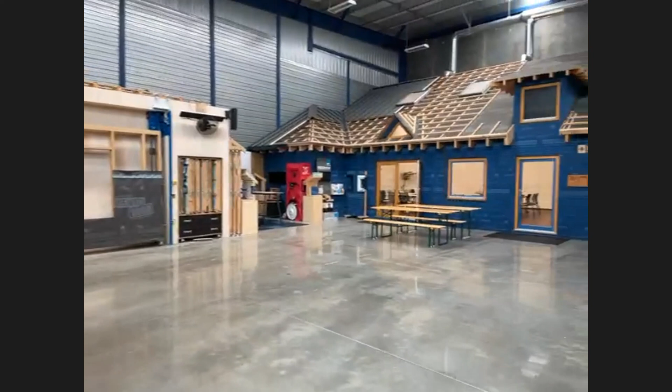So we can see now a live feed from our Auckland facility. Natalie, I hope you can hear me. If you just want to walk through the door and walk through the positions. We built this training facility 3 or 4 years ago, and we use it for theoretical and practical training. And as you can see in the background, the blue house is a very Germanic house with the dormers that you can see there.

We actually wanted to build a full-scale house to show and demonstrate to people what it actually looks like in reality. People need to experience things, because a lot of people haven't had the opportunity to experience this.

As you can see in front of the house, we have lots of open space, with display models for people to touch and feel. We're in the building industry, so we're practical people, and we need to see what options are available. We see a lot of new construction technology coming from overseas - North America, like cross-laminated timber, SIP panels - but also standard frame construction.

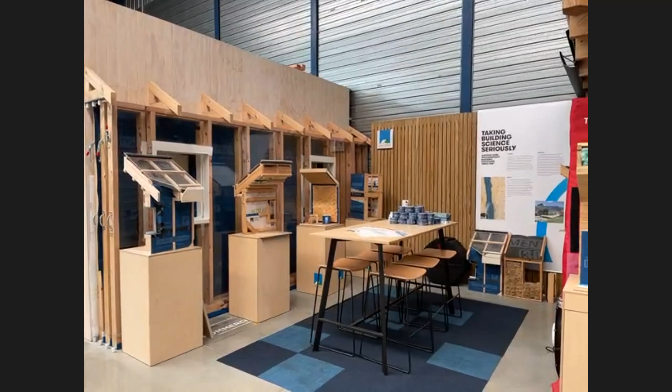If we can just walk into the house, please. One of the key things we often see when we go into high performance houses is that they look the same as everything else. So if we have a look around, you see it looks like a normal seminar house. We left a few things open so people can see some of the construction details, and on the right-hand side we have some cutouts for people using this as a seminar house.

You can see that we have our traditional framing set up with our insulation. In this case, we actually use wood fiber insulation from Germany. We have an air tightness and moisture control layer, which is unheard of most of the time in New Zealand, and also construction cavities or internal service cavities.

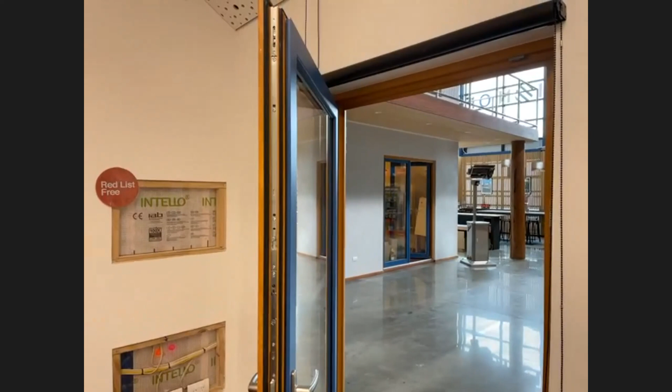If you could please open the door, Natalie. One of the key issues we find in New Zealand is still the performance of windows and doors. These are Passive House certified window and door units that we actually imported from Europe. We're lucky to now also have some local manufacturers in New Zealand who are able to produce to a high level.

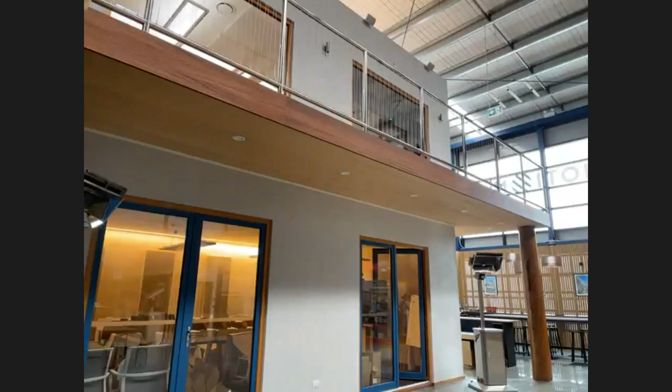This facility is open to anyone to use. We have the seminar house for theoretical and practical training, the open area in front of the house that we can see there, and also practical walls that people can work with.

There's a little walk through the passive house that we built in Auckland. It's still to be certified - the reason is that we don't have an external climate data file, because it's a house within a house, and we're currently monitoring our climate conditions so that we can run the Passive House Planning Package, the PHPP, to get it passive house certified.

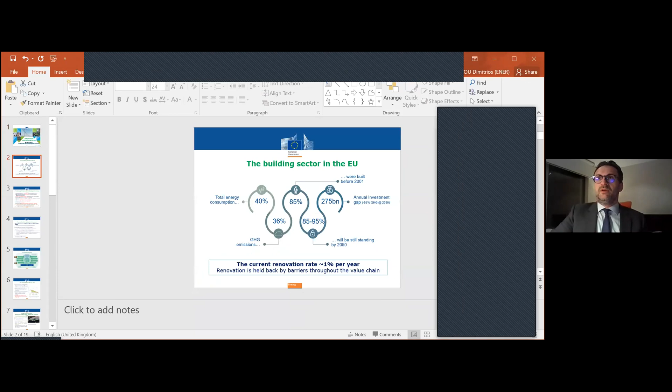So let me quickly share my screen with you, because I have prepared some slides. Can you see my screen? Sorry, I hope you can see my screen. So very quickly, let me start with some basic figures about the building sector in the EU. Sorry, I'm just trying to figure out how it works.

Okay, here we are. So buildings are responsible for about 40% of EU's total energy consumption, and 36% of its greenhouse gas emissions. Due to a well-established legislative framework, new buildings today are more efficient, and they consume something like 50% of what it used to be 20, 30 years ago. But still, existing buildings are very old and inefficient, and most of them will be still standing actually by 2050.

Almost 75% of our building stock is considered to be not highly efficient, while the renovation rates are still very low, about around 1% per year. However, the construction sector generates about 9% of Europe's GDP, and directly accounts for 18 million direct jobs.

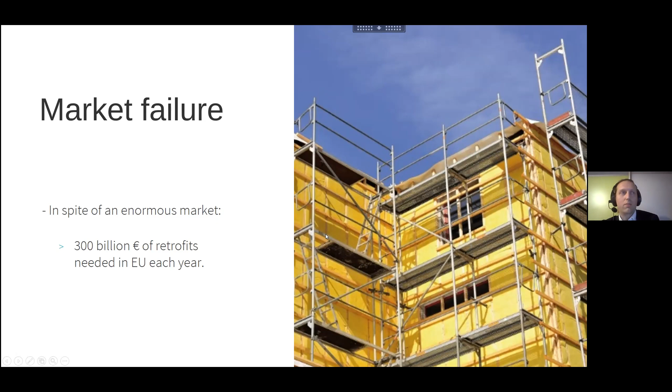Why is it like that? The main reason is that our construction sector works the same way as it did 50 years ago. That means all our other sectors, like industry for example, raised their productivity - industry tripled its productivity over 50 years, but the construction sector is still at the same level because it still works with the same methods it did 50 years ago. So what we think is we will not solve our climate change issues with the technologies we had 50 years ago.

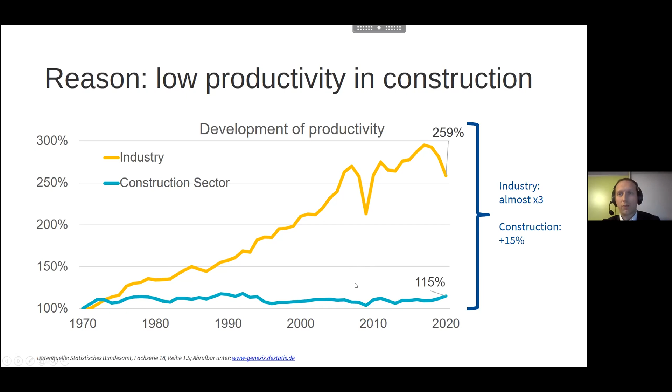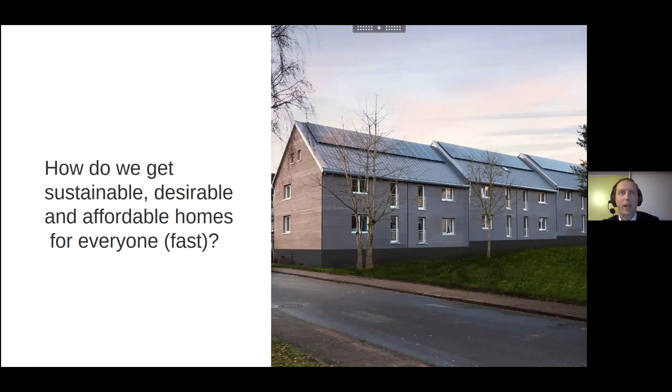We need to invent new technologies. If we ask how do we get to a sustainable, desirable building stock that's at the same time affordable for tenants and for homeowners, and how do we get there fast, then our answer would be we need innovation.

We need, instead of single projects, products. What does that mean in terms of building retrofit? We think a building retrofit should work and could be bought off the shelf if we had solutions that were easy to get, quick to refurbish, affordable for tenants and owners, and at the same time good, meaning durable for a long time and highly efficient, such as a net zero concept. If we achieve these four things at the same time, we believe it's possible to increase our refurbishment rate by far. So what can we do about that?

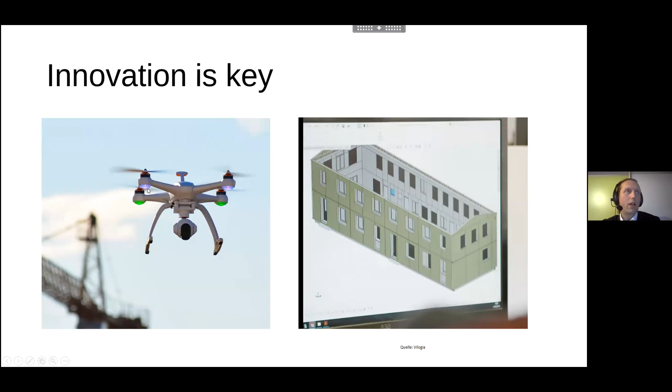In the last years we've had a lot of innovation in the building sector. We just need to use that. We can 3D scan our buildings very exactly. We even have drones today to do the scanning. If we use that technology, we don't need these old solutions because we think they're just not scalable.

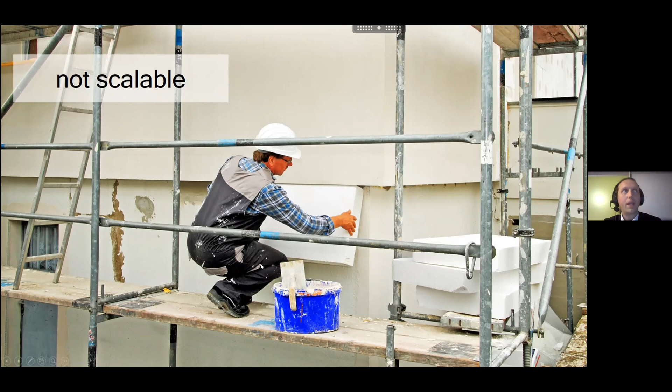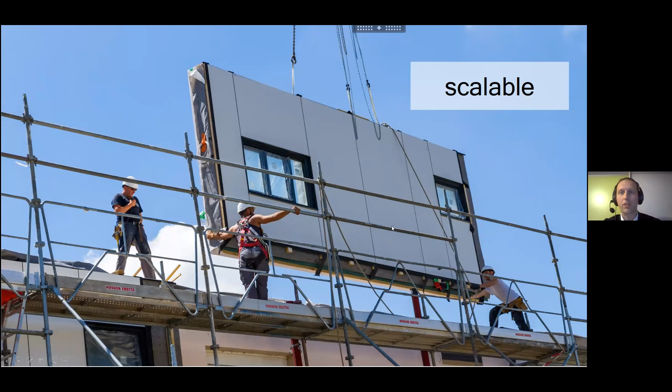Here in Germany and all over Europe, we have a huge issue with scarcity of labor. We don't have the people to double our refurbishment rate because there's just not enough skilled labor. So we would go away from these solutions and go to facade panels, all integrated, maybe even with ventilation or heating integrated into these panels that we can just hang onto our old walls.

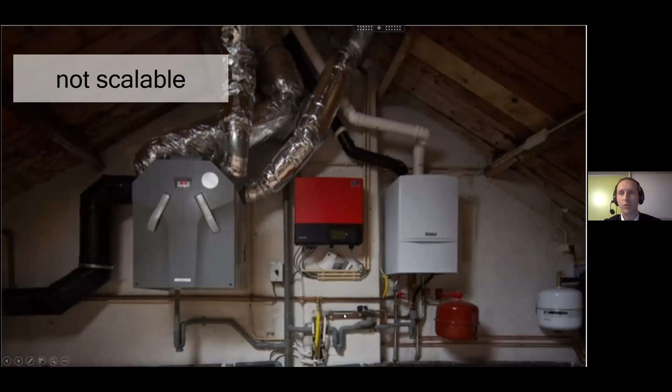We would go away from solutions where a lot of errors happen during installation, and go to these solutions instead. This is an energy module from the Netherlands where everything, the whole technology for a single family house, is included. There's a heat pump integrated up here, a warm water storage down here, the ventilation system here, and some kind of monitoring system and PV system in here. So everything in one box, plug and play. We believe these are the solutions we really need.

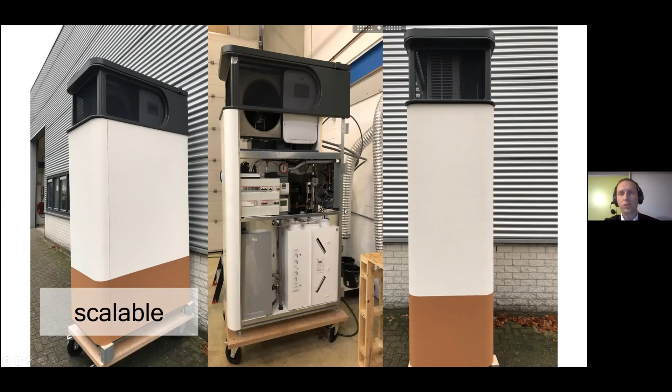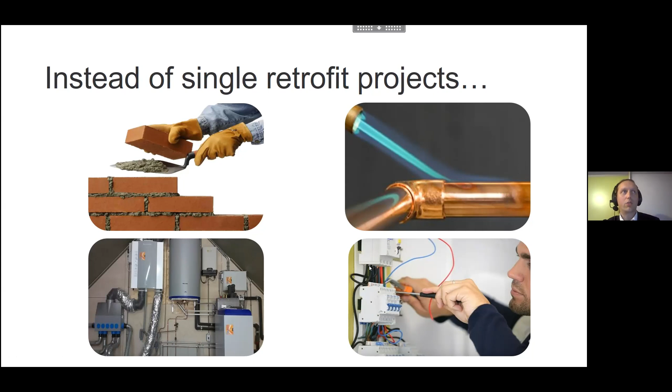That's basically the Energiesprong idea. Let's go away from single retrofit projects where everything is designed on the construction site, and things are done differently each time, sometimes this way, sometimes another way. And let's go to retrofit products, things that can be scaled and done in the same way, the same process, every time. You can see, for example, a robot here that puts bricks on a facade panel that's installed here.

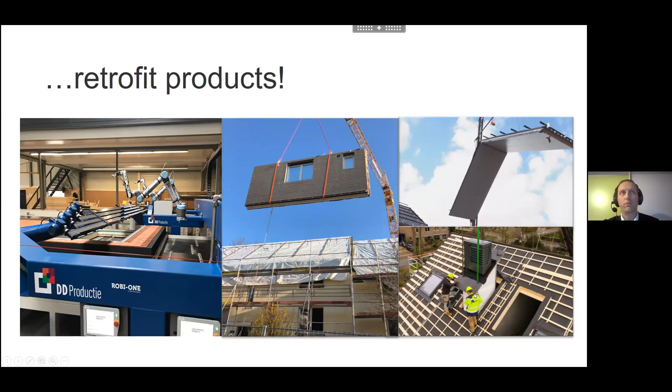Or here, a whole roof that's installed over the old roof without the shingles on a single family building. Or here, this is a heat pump system, a whole energy module integrated into the old roof. What can we do about that?

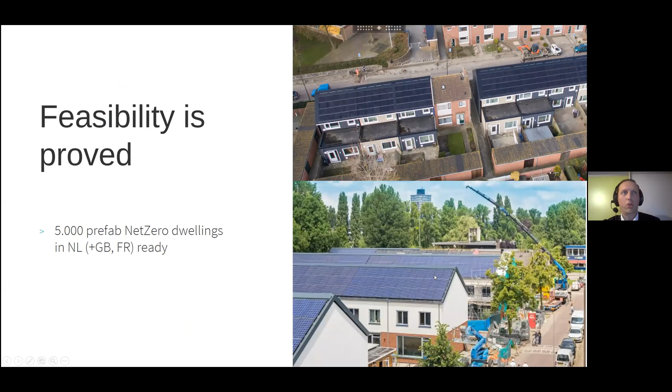We've seen in the Netherlands that already 5,000 of these retrofits have been finished - net zero retrofits where all the energy the house needs over the year is generated on the roof, for heating, for hot water, and also for household energy. And in Germany, we have a few pilots already going on.

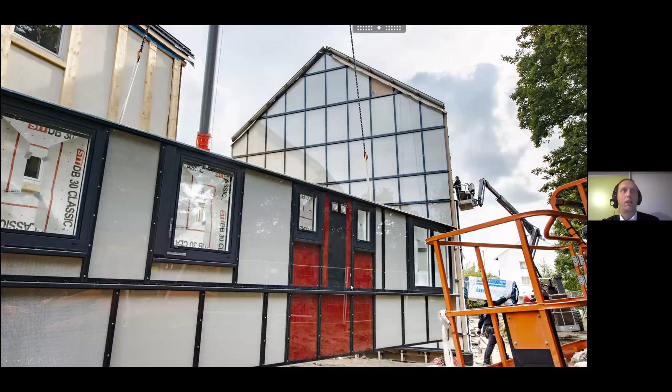In Germany, we have multifamily buildings that need to be retrofitted. This is the way they're retrofitted, with facade panels, everything integrated, passive house standard. And this is how we can get these buildings to become net zero homes.

We have good political support in some countries. Here in Germany, there's a 300 million euro funding scheme for the development of new products such as facade panels, roof panels, and energy modules. The European Union also supports the Energiesprong idea with certain projects - it's mentioned in the EU Renovation Wave. Outside Europe, we can also see, for example in New York State, a 30 million euro funding support for new solutions.

What we try to do in the Energiesprong initiatives in 7 countries now is achieve a first market, not only pilot projects, but secure a volume deal - a first volume, for example 30,000 dwellings - with housing associations, so that it makes sense for the industry to innovate on products.

This is the challenge we have in all these 7 countries. Basically, we try to get costs down through scale - that's why we need the volume deal - and also through innovation with new products and new ideas. But at the same time, we try to improve the business cases for the owners.

That means we try to allow for higher costs through additional incomes for the owners of the buildings, basically housing associations. And then, if there's still a gap in financing, we try to fill that together with the local governments with some additional subsidies, so we can create a solution for the buildings that's affordable for tenants, but at the same time affordable for the owners as well.

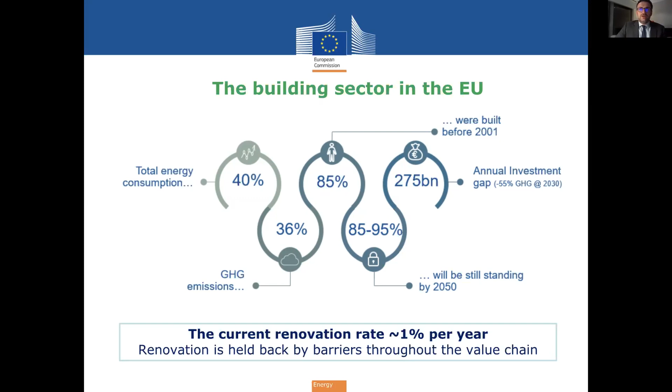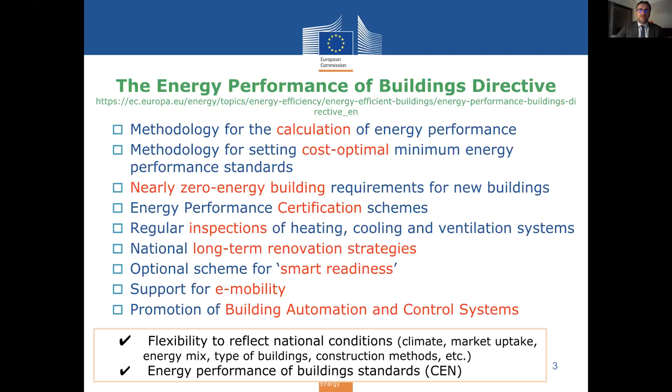We can find in our legislation provisions supporting e-mobility, the recharging points that now must be installed in new buildings or buildings undergoing major renovations. We have also introduced an optional scheme for the smart readiness indicator, so we can see how buildings relate to digitalization and other technologies, also support for building automation and control systems, and so on. But all this allows for flexibility to member states to reflect national conditions, like different climate conditions, market uptake, and so on. We also have a set of standards supporting all this legislative framework. Next slide, please.

This legislative framework is also supported by other relevant pieces of legislation, like the Energy Efficiency Directive, which is an umbrella framework directive. There we can see provisions regarding public buildings that have to be renovated annually: 3% of the total floor area of public buildings must be renovated annually. There is also the eco-labeling and eco-design legislation. The eco-design sets minimum standards so that we can eliminate least performing products from the market, and the energy label provides a clear indication of the energy efficiency of key products.

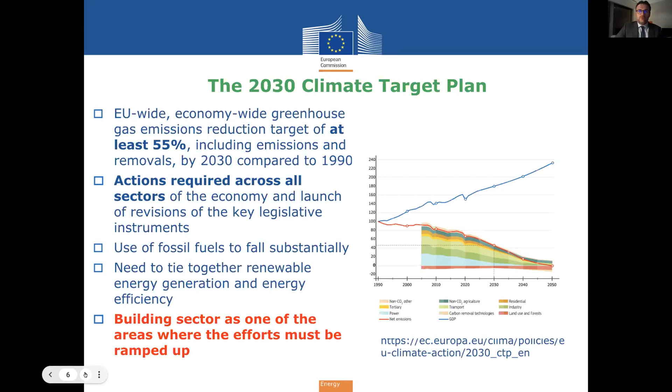In order to actually implement the European Green Deal, we adopted the Climate Target Plan for 2030, with a goal to cut net greenhouse gas emissions in the EU by at least 55% by 2030. This triggers actions for all different sectors. As I mentioned before, the building sector is one of the most important areas, together with the renewable sector, with the need to start banning fossil fuels, for example, and so on.

This is why, among other initiatives, the Commission has also announced the Renovation Wave initiative as part of the European Green Deal, with the objective to at least double the annual energy renovation rate of residential and non-residential buildings in the EU. I will try to speed up a little bit, and also make sure that renovations lead to a higher and deeper quality.

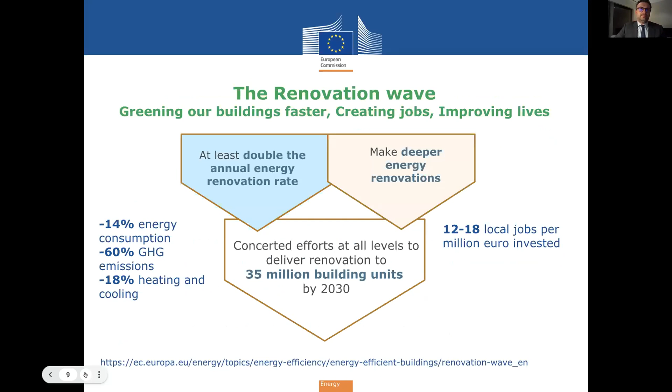And indeed, this is the case with the Renovation Wave. I'm just trying to keep the time frame. It also brings into the discussion other key principles, such as energy efficiency first, affordability, energy poverty, life cycle thinking, and high health and environmental standards, like safety reasons, also aesthetics, and so on.

The main initiatives we're taking under the Renovation Wave are to better inform citizens through digital logbooks or through EPCs and so on, increase funding, and also provide technical assistance. Also work on the skills necessary, the capacities of professionals in the construction sector, but also try to address other elements such as smartness in buildings and renewables.

The focus areas are the worst performing buildings and energy poverty. This is where we need to focus for obvious reasons, but also public buildings, with a focus on schools, hospitals, and care facilities. Again, it is important to see the decarbonization of the heating and cooling sector, and it's interesting to explore what is happening in what we call neighborhood or district approaches, applying some requirements at the neighborhood level.

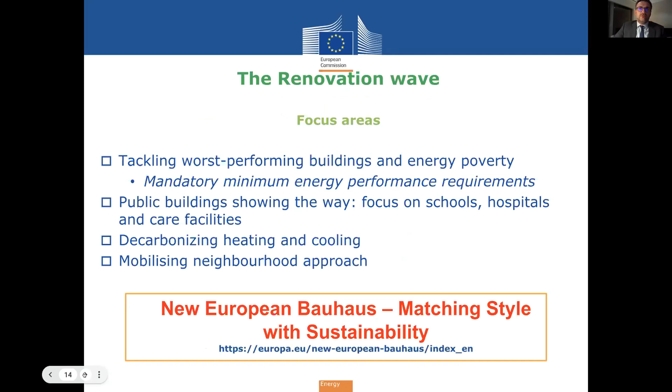We've seen this one, so let's move to the next one. With regards to budget, we have accompanied the renovation with a long list of investment opportunities and funding opportunities that could be applied either for direct investments or instruments to leverage private investments, different for market barriers, technical assistance, and so on.

We can also refer to the recovery plans and the Recovery and Resilience Facility, which was set up to recover our economy from the pandemic, and a lot of money is coming out from this fund.

So yes, indeed, the recovery resilience facility has already, according to our estimations so far, almost 60 to 70 billion euros already approved to be used in member states for renovation purposes. We also have cohesion policy funds, and we estimate another 20 to 30 billion euros to target construction and renovations in the coming years.

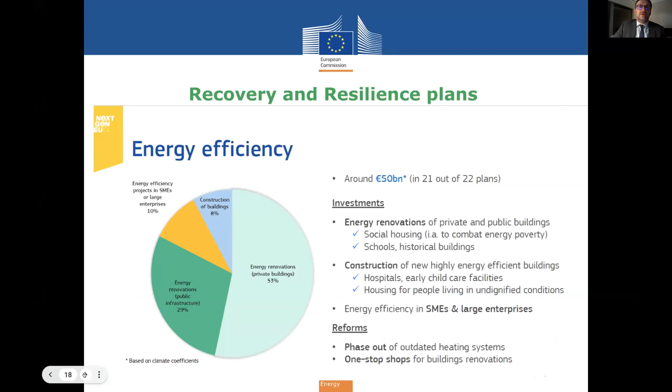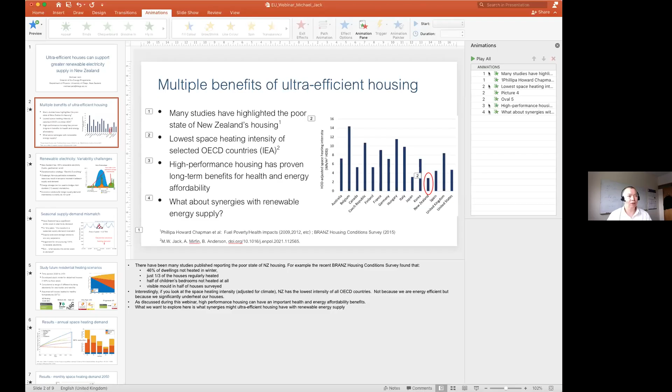Kia ora koutou, everyone. I'm Michael Jack, Director of the Energy Program at the Department of Physics, University of Otago. Can you hear me all okay? Yep, loud and clear. Thanks, Michael.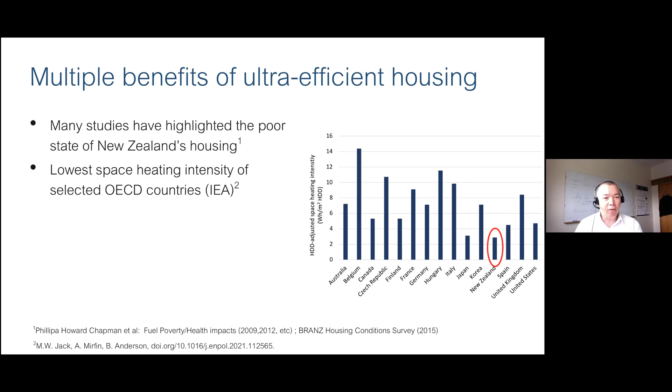Okay, great. Some of the talks so far have been about solutions, and I want to talk more about some of the why. As we heard right at the beginning from Lynn, there are a number of studies that have highlighted the poor state of New Zealand housing and the impacts on health and energy poverty of that. It's interesting, if you look at a graph of the energy intensity of OECD countries, and even adjust that for climate, you find that New Zealand actually has one of the lowest energy intensities across all those countries. And that's not because we have particularly efficient buildings, it's because we are not heating our houses enough.

So, as we've discussed, these high performance housing types that we're talking about have proven long-term benefits for health and energy affordability. What I want to talk about is the synergies with renewable energy supply. This is another motivation for thinking about these efficient buildings.

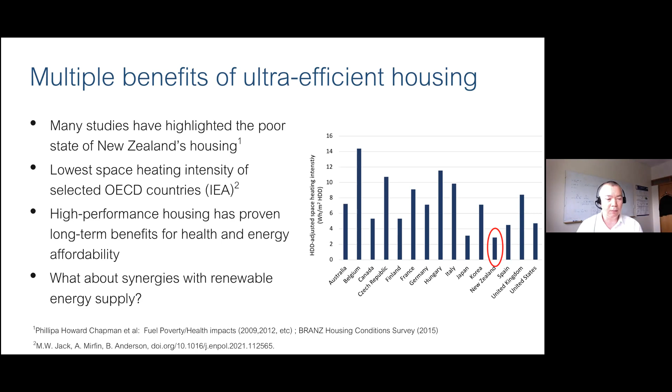For the Europeans, New Zealand has 85% renewable electricity, mainly dominated by hydro. And of course, therefore, our main decarbonisation strategy is essentially, let's increase the percentage of renewable electricity we have and then electrify everything - that means essentially transport and heat. So that's the basic idea. The big challenge with renewables, though, is that they're non-dispatchable, and so there's this mismatch between supply and demand. This is very easy to see in the case of solar photovoltaics, where you have solar providing energy during the middle of the day, whereas that's not necessarily where your demand for energy is.

You can solve this problem with energy storage, and the size of the energy storage required is given by the area under the curve on this graph. This can work with short duration mismatches between supply and demand, but there's really no economic solutions for longer term supply and demand mismatches. They simply don't exist from a technical sense.

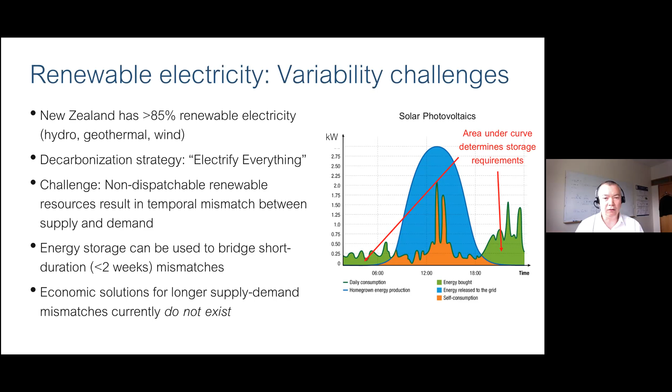This is a big problem for New Zealand because we have a significant winter peak in electricity demand. This is shown in the graph where I'm showing monthly electricity demand. There's a large base load, but then there's this peak in winter. This is a big problem in so-called dry years, where we don't have much rainfall and our hydro lakes are low, resulting in a seasonal supply-demand mismatch.

So unlike the supply-demand mismatch I showed before with solar, which was daily, this is on a seasonal basis. So you have this huge amount of energy that you have to supply if you were trying to store it.

And that means if you're thinking about trying to solve this problem from the supply side, then you would need to think about overbuilding renewable generation, so overbuilding wind, for example, or large-scale storage solutions like a large pumped hydro storage scheme, which is being discussed.

And some of this has been brought up as an argument for not pursuing 100% renewable electricity. We can't do it, so we will just have to accept not being able to achieve that 100%.

But there's been very little discussion of what actually causes this winter peak in demand. And Lynn mentioned this before, that actually, if you look very closely, it's residential space heating demand. So I've plotted on the bottom of that graph the residential space heating demand that's been estimated, and you can see there's a very clear overlap with the national demand. It turns out that this is almost the majority of that seasonal demand.

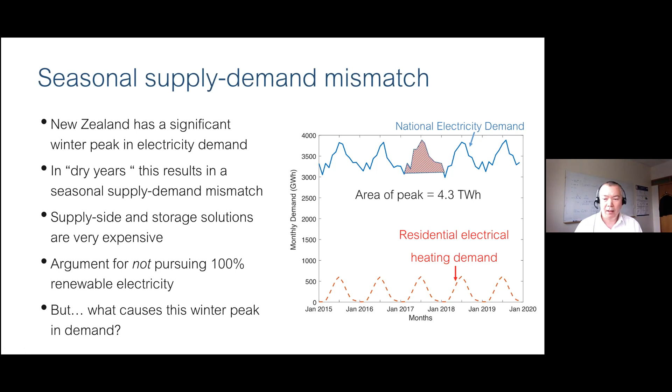So we wanted to look at future residential heating scenarios. We chose a time period, 2020 to 2050, to align with climate targets. First, we developed a stock model for detached houses. Detached houses in New Zealand make up about 90% of the floor area of our houses, so it's a good thing to focus on at first.

There are multiple assumptions behind this stock model, and I don't have time to go into it here, but I'll show you the results. This is what it looks like in terms of total floor area, and you can see we've got new houses being built due to our demolishing rate. Our lifetime of a house is around about 90 years, and then also there's an aggressive retrofitting program going on here.

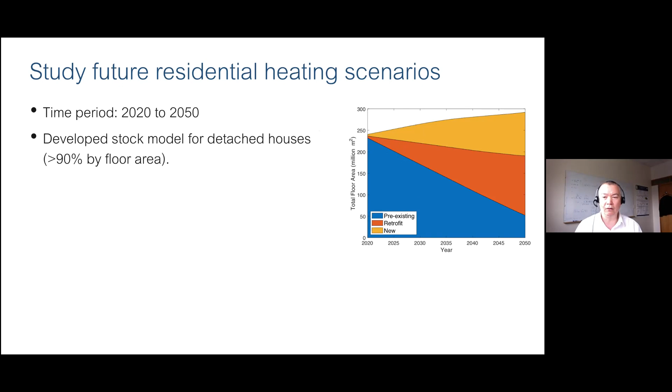This is based off the consented retrofits that are happening now. Of course, those retrofits are not energy efficiency retrofits, but it gives us a baseline for thinking about the rate at which you could retrofit buildings. And that becomes very important.

So on top of that stock model, we considered a range of different building standards for new builds and retrofits. We looked at the current New Zealand Building Code, a number of green building standards, which we're calling medium to high standards, and the passive house standard, which here I'm referring to as very high. In addition, we looked at a progressive approach, where you would go from the New Zealand Building Code to the passive house standard over that 30-year time period.

I guess the other thing we assumed is that all houses are heated to healthy temperatures. This provides a baseline for our study, but it doesn't make sense to think about future scenarios where you continue to have unhealthy houses.

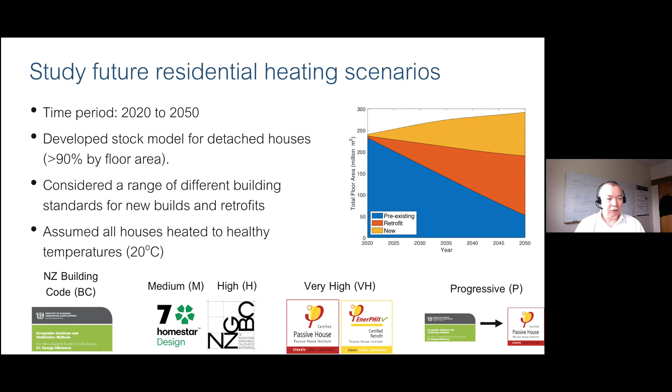Okay, so I'll just leap into the results, since we don't have time to talk about too much of the details. What I've plotted here is the annual space heating demand for each of those different scenarios. The top curve here is the building code results, and that shows a huge increase in space heating demand, because we are now heating our houses to 20 degrees. With the types of insulation that even the building code provides, that's going to mean total annual demand is going to grow.

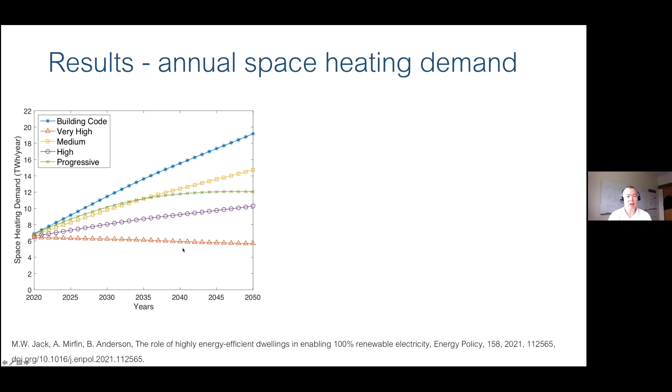In contrast, you can see the very high standard where, even though we've got a growth in buildings, we're heating to healthy temperatures, and you are not getting a growth in annual demand. The difference between those two is around about a 66% reduction.

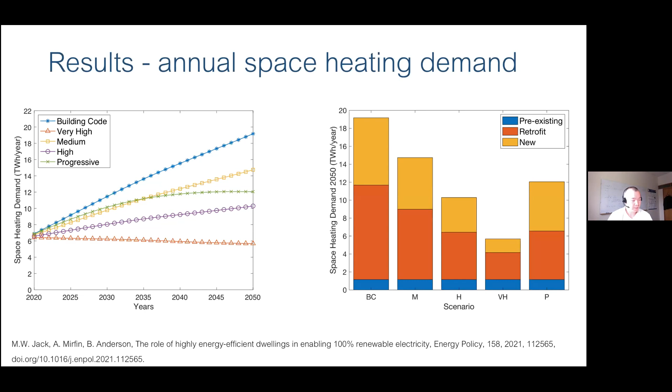What we were really interested in though is this monthly space heating demand, and that was the real focus of our study. So this is the monthly space heating demand for each of those scenarios in 2050.

We've got the current space heating demand, which is the black dotted line. The building code scenario, which is the orange line, shows a huge increase in winter demand due to that scenario. Then the very high scenario, basically the passive house standard, reduces space heating demand below where it currently is.

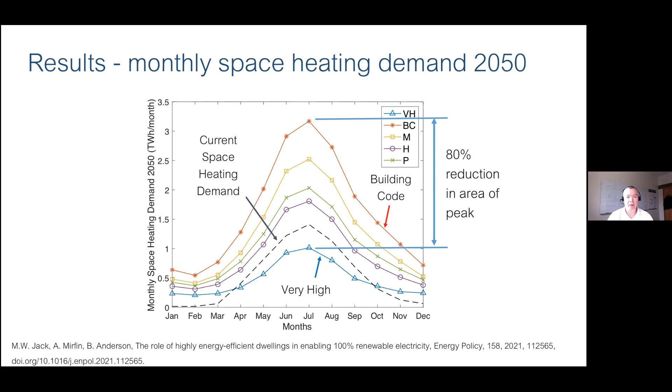Even with new builds and heating to energy efficient temperatures, this basically equates to an 80% reduction in the area of that peak that I was talking about, which is the problematic issue. So this space heating demand does not directly relate to electricity peak, because it's a space heating demand rather than an electricity demand.

To understand the impact on electricity, you have to first understand that in New Zealand about 70% of heating in buildings is provided by electricity, and this is likely to increase with that electrify everything scenario. But it also depends on the efficiency of electrical heating.

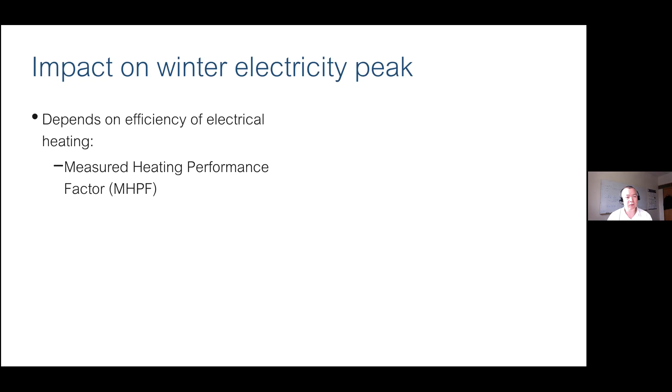So a good way of looking at that is to look at the national average measured heating performance of your heating devices. This graph shows you the area under the peak as a function of that national average. Currently we're sitting at about 1.5, so we get about 1.5 units of heat out of every unit of electricity.

In contrast, the heat pump coefficient of performance is 2 to 3. So that means we're doing a lot of heating just with straight resistance heaters. This graph shows you the area under the peak.

That solid line is the current peak. The dotted line here is the residential heating demand, and you can see how this changes as you increase that measured heating performance factor, which we expect to increase in the future. Where it will end up, we're not too sure, but for realistic measured heating performances, these buildings have a significant impact on reducing that peak.

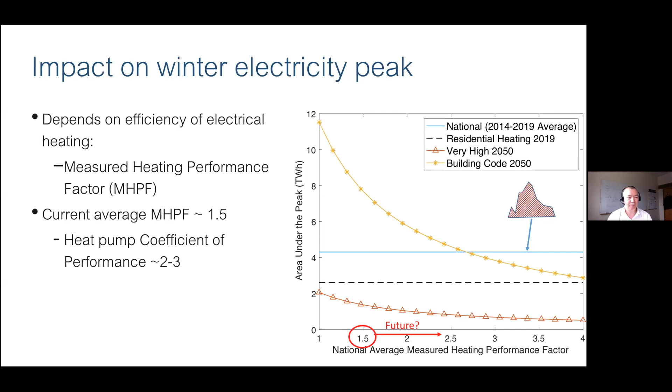So just in summary, buildings are often kind of neglected or ignored in decarbonisation discussions, or at least put to one side, and that's because only 4% of greenhouse gas emissions come from buildings.

But the point here is that these best practice standards could significantly reduce winter heating demand, and that could also help integration of renewables and thus decarbonisation of the overall energy system. What our results have shown is that slower implementation will significantly delay these benefits, and that retrofits are critical.

So I guess what we are arguing for is that there are a bunch of different reasons why you want energy efficient residential buildings, and it's both based on their health, efficiency, and energy affordability benefits, but also their role that we've tried to show in decarbonisation and enabling renewables. Okay, thank you.

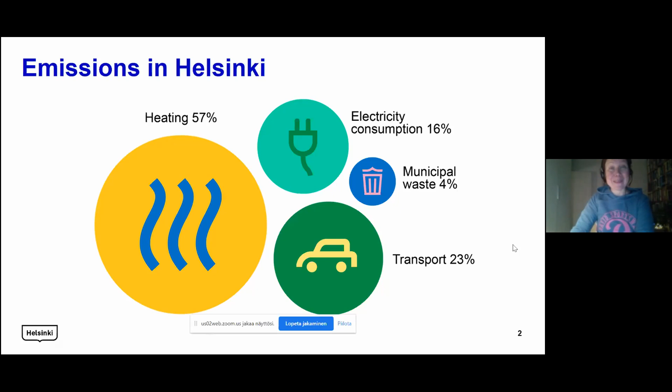In our climate program, the City of Helsinki has a target to be carbon neutral by 2035. But a couple of weeks ago, our new city council and new mayor decided they want to make this even more ambitious, and decided we want to be carbon neutral already in 2030. And it's even not enough, because by 2040 we have to be zero carbon. So we even have to go further than just carbon neutral.

Here you can see how we are doing at the moment. We have cut emissions by a third already, of the total emissions. The city is growing all the time, so we are building a lot of new buildings, and there are more people living here, more traffic, more cars on the streets. But by resident, by person, we have cut emissions by half already. As you can see in this picture, it's not updated, because the decision on the new target was made a couple of weeks ago, so we haven't had time to update this slide. But you can see we have a very steep curve ahead of us, so we have to do more in coming years to achieve our target to be carbon neutral by 2030.

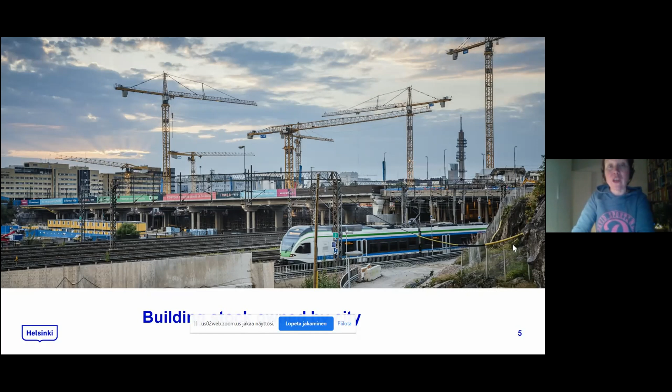Every renovation we do is an energy renovation, so at least 34% of the energy consumption needs to go away every time we renovate something. We are also using geothermal or heat pumps as the main heating system for new buildings, and we are installing a lot of solar PVs on the buildings we own.

But of course, it's not everything. 80% of the buildings in the city are owned by others, and it's not enough that we only concentrate on the buildings owned by the city. For those buildings owned by others, first of all we are able to set rental agreement requirements. We mandated that all new buildings here in the city have to be in the best energy efficiency class, so every building has to be A class. This is possible because the City of Helsinki owns most of the land here, and we rent it out rather than selling it. As a rental agreement requirement, we are able to set that kind of mandatory requirement for the buildings.

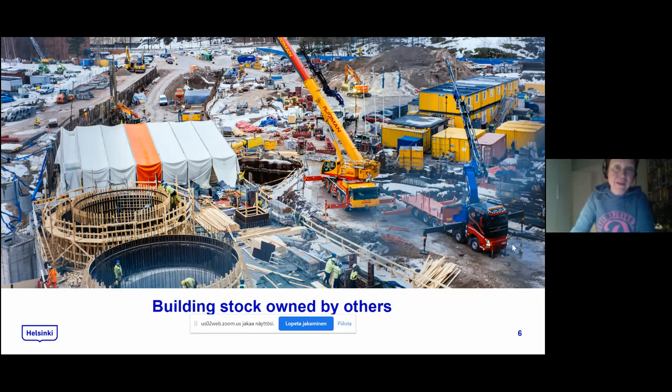But then we have a big existing stock which is owned mainly by private people, and there we don't have any power to force them to do anything.

A couple of years ago we studied that, and we found out that the main obstacle, the main bottleneck for energy efficiency renovations, is that they are very difficult for normal people. In Finland, if you own an apartment in a residential building, you are automatically a shareholder in the housing association.

So the buildings are run mainly by normal people, and they don't know where to start. To tackle that, we started a team called Energy Renaissance, and we hired 10 energy engineers to work for the city. Their main job is to help private house owners run energy renovations, providing hands-on help for normal people.

And it has been a great success. We have more jobs, more asks, and more contacts than we can handle. It's just showing that the money is there - energy efficiency renovations actually make economic sense here in Finland. So the main obstacle was really that people needed engineering power, and now we are offering that for them and trying to tackle the obstacle.

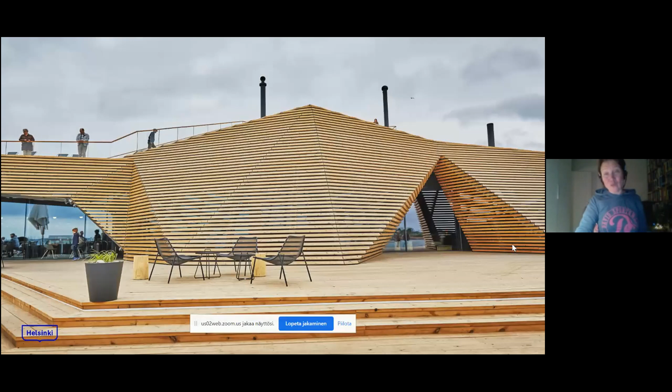But even focusing on that is not enough, because energy efficiency and energy production are the direct emissions, and when we are building something, we are also generating indirect emissions, and we have to concentrate on those too. The next step is that we are going to set a limit for the carbon footprint of buildings, because we want to regulate and minimize the footprint of buildings and that kind of indirect, material-related, embodied carbon emissions.

It's basically as I've already listed - there are many things we have to do first. I'm always saying that we only have 9 years to be carbon neutral, and that means we don't have the luxury of doing things step by step, but we have to do many things at the same time. We have to do big things first, as time is our biggest enemy.

We have already come down 33%. And the quality of life here in Finland, comparing to the year 1990, has not come down - actually the quality of life is much higher and better now than 30 years ago. So when people are worried about what kind of lifestyle we are going to have in the carbon neutral and zero carbon world, we can show them that we have already shown we are able to do it and still keep a very good quality of life if we do it wisely.

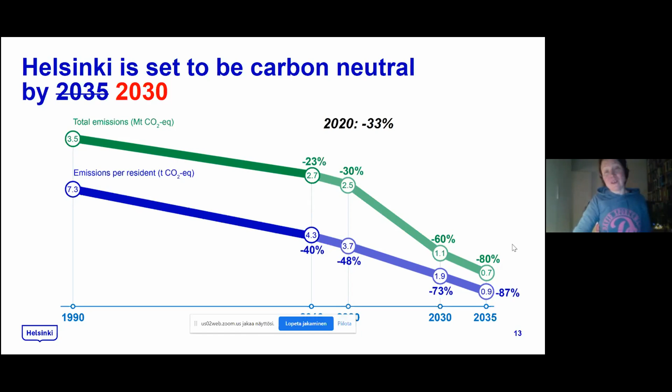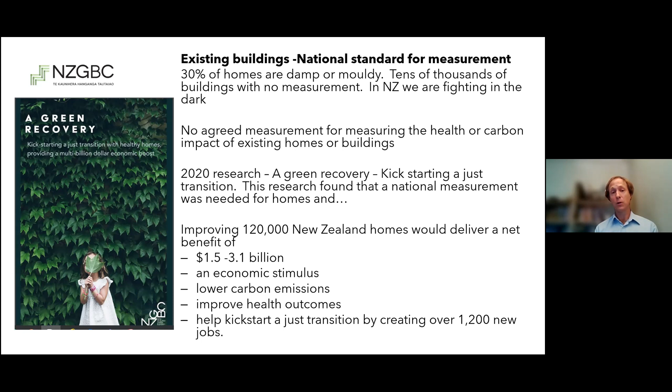We looked at this with our Green Recovery report and set out that kickstarting a just transition could be driven through improving 120,000 homes, which would deliver billions of dollars worth of stimulus, lower carbon emissions, healthy outcomes, and help kickstart a just transition by creating 1,200 new jobs in Aotearoa. The International Energy Agency says one of the quickest ways to create really good jobs is to get retrofitting existing homes.

But also on buildings, I noticed this conversation was also around buildings. I thought I'd illustrate the power of getting a standard in and measuring to that. NABERS is a scheme that is mandatory in Australia. I thought I'd show you the power of uptake of this tool in Australia.

In 2007, less than 10% of office buildings got 4, 5 or 6 star ratings. Then states started to say they wanted 4, 5 or 6 star rated office buildings when they leased, so by 2010 close to 20% of office buildings were energy efficient. Then government brought in mandatory display of energy efficiency of office buildings, something you take for granted in the EU. But by 2016, over 50% of the larger office buildings in Australia were at 4, 5 or 6 star ratings.

So a massive injection of private capital to improve the office stock, and that saved Australian businesses and government taxpayers around $1 billion worth of energy bills. In New Zealand, we've looked at this and found that implementing a transparency regime such as NABERS would deliver a saving of just under $600 per tonne saved, and deliver $47 to $120 million worth of benefits just from implementing this measure for office buildings alone.

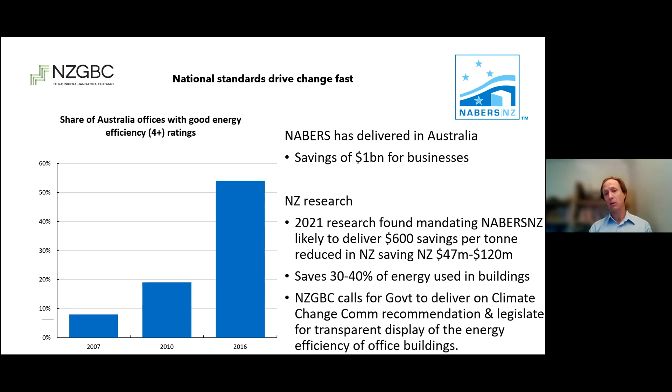NABERS delivers a 30 to 40% saving in the energy use of office buildings, and this is a big deal. If we took just 1,200 of New Zealand's larger office buildings and got them to low, near zero energy, that saves the amount of energy we generate from all of the wind turbines in New Zealand.

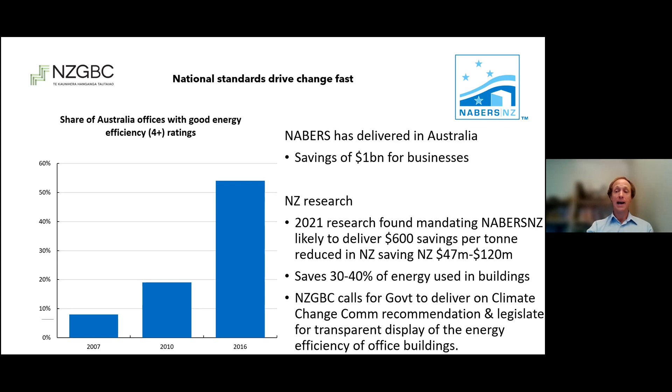So we're calling on government to deliver this NABERS regime for office buildings and then look to extend it to other buildings. We'd like them to do that next year in this electoral term.

On existing homes, there is a program in New Zealand called Warmer Kiwi Homes, and it has increased the number of homes being improved by 40,000 extra homes, which is a step forward. Our challenge is that this is still relatively limited improvements to homes, but it's not talking about windows or deep retrofits, air tightness, those sorts of measures that we see from Energie Sprong or other measures.

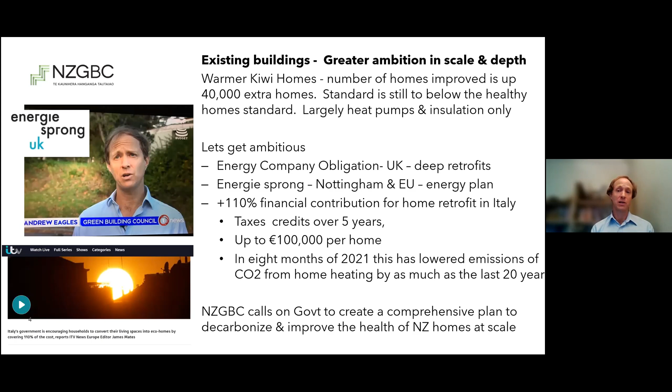I just list some other international examples. You heard some here of great case studies where you're getting deep retrofit to reduce carbon and improve health. So we're calling on government to create a comprehensive plan to decarbonise and improve the health of New Zealand homes at scale.

I thought I'd touch on embodied carbon. We've been making some inroads on how we think about embodied carbon in New Zealand, and this is really crucial - it's about half of our carbon emissions. So we've called for change through our zero carbon roadmap. Some of those building materials - concrete, steel and aluminium in particular - are quite significant for non-residential buildings, and we need to think about that as well when we decarbonise.

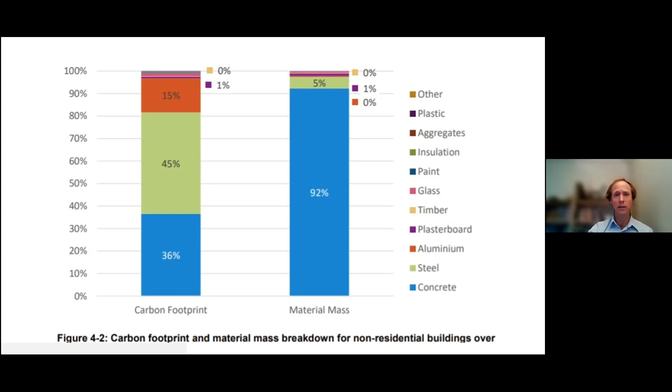So government is stepping up on this. They're calling on government departments to create a low carbon brief and prioritise a focus on measuring and reducing embodied carbon emissions when they build new buildings, and they're driving that quite hard. It's good to see that. I think we need more checks at the built stage, but embodied carbon is coming to the fore in Aotearoa, New Zealand.

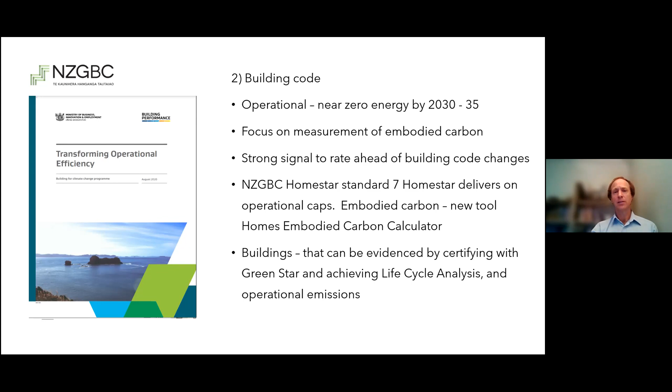Through the building code, we now have expected improvements to a goal of near zero energy by 2030, to 35, a focus on measurement and in-time reduction in embodied carbon, and a strong signal from the Building for Climate Change team who are leading that entities should be building ahead of the building code, a bit like the Helsinki example. So what we've done at the New Zealand Green Building Council is we've created tools that can enable people to meet those future regulatory changes. The possible timings are around 3 caps to get to near zero energy in our homes and buildings, probably changing around 2024, something like 2027, and then 2030. We've created tools to align with those caps so that people can know ahead of the changes how they're doing on operational and embodied carbon emissions.

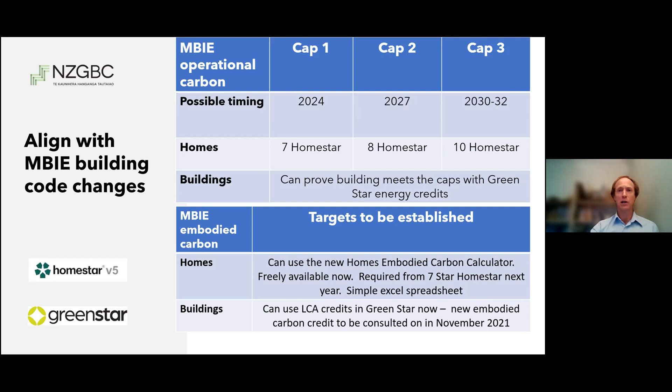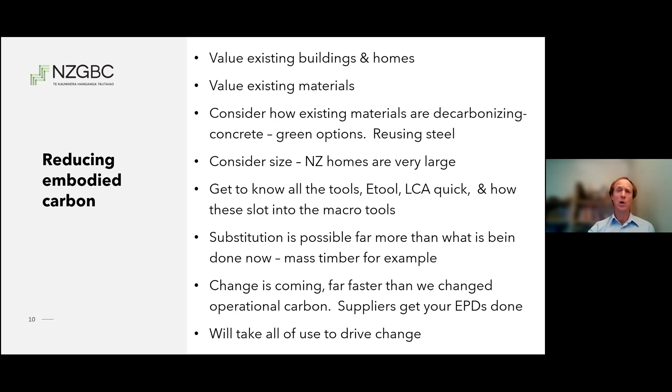Particularly in New Zealand, with our low carbon grid, Michael Jack raises some really good points around how we can save a lot of energy through our grid for other uses and peak load. It's going to be really important that we also focus on embodied carbon over time. So I have just some points for reducing embodied carbon. New Zealand homes are 5 times the carbon footprint needed to reach Paris climate change targets. So we need to look at this, and also operational carbon, and get down to those low operational carbon targets through passive house or super energy efficient homes. These are some steps we can take to reduce embodied carbon in the homes and buildings we're building.

I'll just touch on a small plug for urban design and low carbon impacts, and how we think about that in a wider sense. How we build has a huge impact on transport emissions. We're seeing a huge increase in cycling as a result of good end-of-trip facilities in buildings. We think e-transport needs to be heavily integrated and incentivized, and being near public transport. I know we all know this, but sometimes I think we might not focus on it enough, and we need to encourage building denser. In New Zealand, there's been a step forward on this recently with reducing minimum requirements, enabling people to build denser in general, which is positive.

And then finally, just to consider resilience to climate change, water shortages, overheating and flood risks. Auckland's been in a drought for over 2 years, and yet we have no incentives when we build new homes or retrofit to put in water efficient devices. There's no measurement of water efficiency in our office buildings.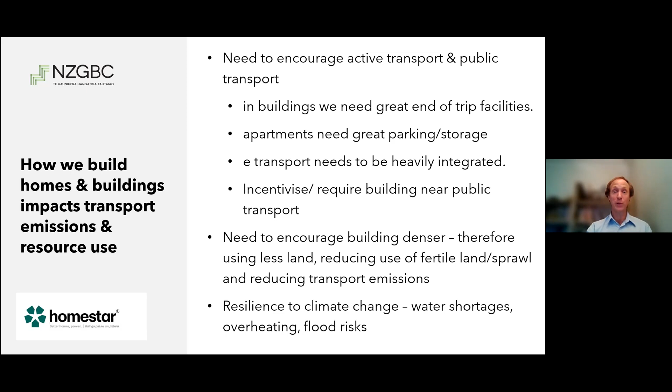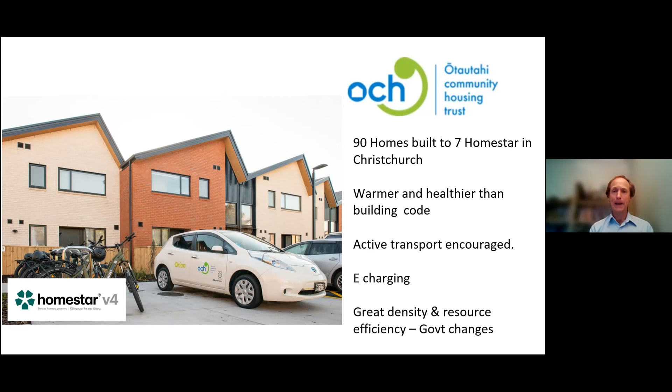Here's just an example, buildings taken ahead by Ōtautahi Community Housing Trust in Christchurch. They built a 7-star home, over 30% better than building code, warmer and healthier, but also some great stuff on active transport, e-charging, and some steps on density and resource efficiency.

So it's a huge kia ora for the opportunity to speak today. I really look forward to the discussion. I've gone through it pretty fast, I know we're over time. Big thank you from the New Zealand Green Building Council, we work on behalf of our 600 members. I really look forward to the discussion and driving this further forward to a low carbon future. Kia ora.

Thanks, Andrew, that was great. And it does look like the panelists have been diligent about actually answering all of the questions that have been asked, at least by putting in some responses. So perhaps though we could get a bit of discussion. It looks like our most popular question may have been about cooling.

It looks like Michael Jack, you had written an answer to that, so that we know about the issues with heating, but we're kind of lucky in New Zealand that we don't necessarily need a lot of cooling, but that's going to change. Can you take that question, and can we maybe spotlight the panelists?

Yeah, I can probably say something about it, but I'm sure the panelists have a lot more to say about this than me. I guess because I'm focusing on things like how do you supply it with renewable energy. I always think about cooling as being almost perfectly matched with things like solar PV. So to me, it's kind of less of a technical problem. Obviously it increases energy use, but the point is that you have potential renewable solutions to that.